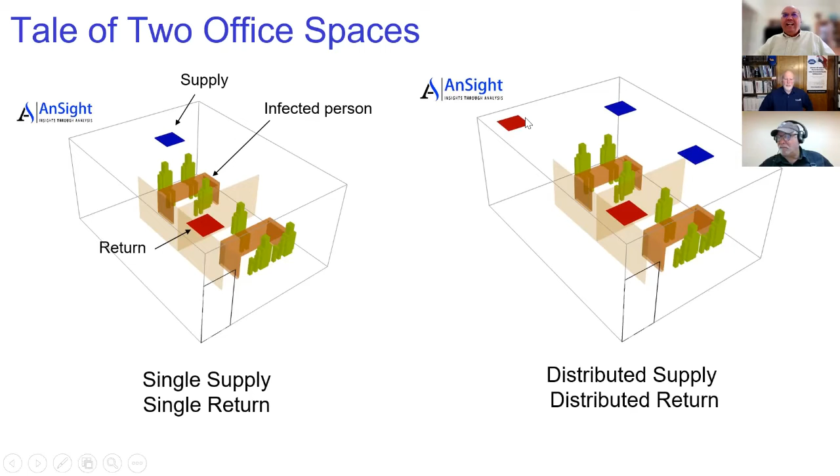In another example, it's the same office space, but instead of bringing air just from one diffuser, I divide it among 2 diffusers here, 2 blue squares. I'm not increasing the amount of air, I'm just distributing it in 2 places. And instead of taking it out just from one red square, the return, I created one more grill here. 2 grills, 2 supply. And you will see it makes a tremendous difference.

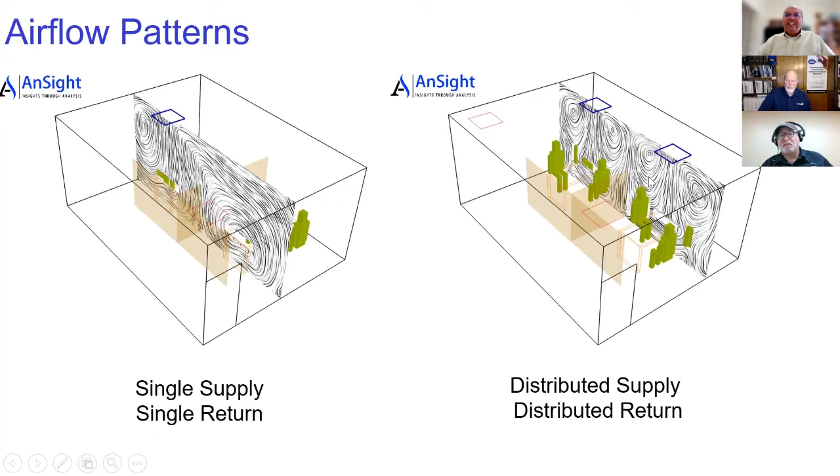These lines show how the air is moving into the space. In one case, air moves all the way to the other end and then circulates. Here, the air comes from 2 diffusers and they create their own tiny recirculation patterns. I call it aerodynamic containment, and I will explain why.

So what, aerodynamic what? Aerodynamic containment, and I will explain to you why I call that arrangement aerodynamic.

You take the path of least resistance, you take the first exit. Germs are doing the same thing. They are finding, hey, here is my exit. I don't need to go to another cubicle, I can get out from here.

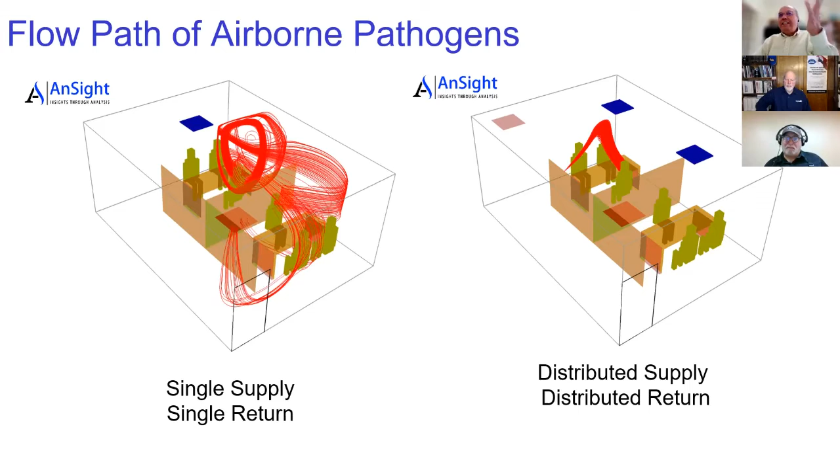Now, this is a computational fluid dynamics simulation. What it's telling me is two supply diffusers are better than one, and two return grills are better than one. That's the direction it gives you. It's not exactly predicting where people will sit or exactly which path the germs will follow. There is a possibility that this second arrangement is better than the first one.

So if you take this and color it by the probability that people will get infected in this space, this is the kind of cut plane at your nose level. This is another thing to understand: what happens at your breathing zone? I call it the breathing zone, it's about 4 to 6 feet height from the finished floor.

That is important. What happens near the floor and what happens near the ceiling is not as important as what you breathe in and what you breathe out. So if I look at the breathing plane of the people at about 4 feet height from the floor, what it tells me is I have a very high probability of infection with this kind of ventilation arrangement.

More people will get infected, even if they are 6 feet apart. We are talking so much about this social distancing, but social distancing is as good as the airflow around you. If you have a bad airflow pattern, as in this case, 6 feet distance doesn't work. You will still get the germs, and there is a high probability of getting infected.

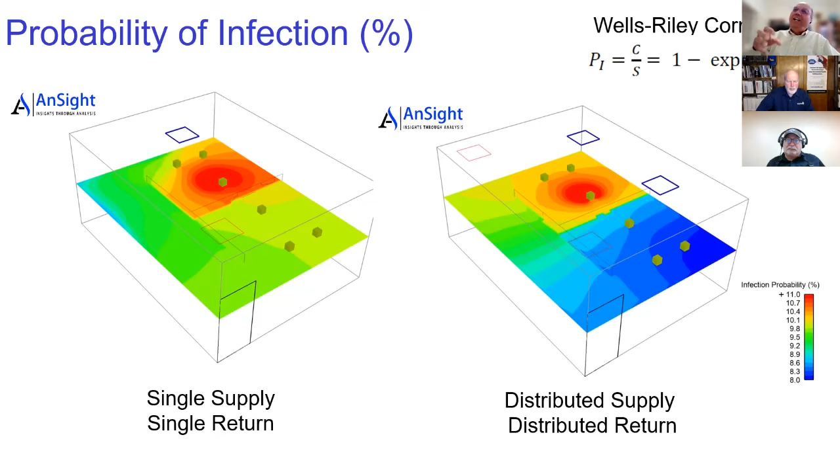Just put two supplies here, divide that air at two places, and bring it down and take it out from two places. Instead of supplying the air at one place and letting it move, you are supplying it at two places for the people. And so this green color turns to blue, meaning I reduce the probability of infection substantially, simply by supplying the flow of air over the people.

If I improve my ventilation here, bring air in a distributed fashion and take it out in a distributed way, I reduce that cloud size to 36% from 50%.

I'm not doing anything else. I'm not increasing airflow, not using any air cleaner, not using any UVC. I'm just using good clean air to dilute and mitigate the probability of infection of the contaminants here.

That's interesting. Now, you could also, if you wanted to, take that room divider out and look at it again and see with and without the room divider how those germs or virus would spread. And yes, that is another good point.

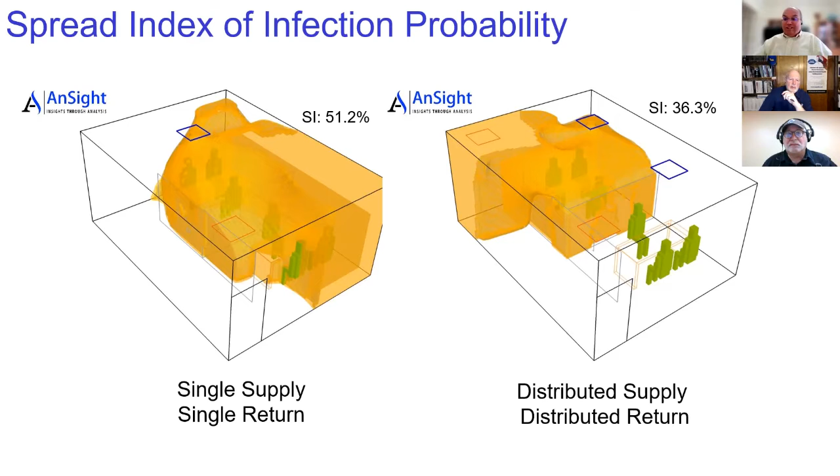Two things here. Number one, you need to have that building already built, occupied, and commissioned. In CFD, I can do this even if your design is still on paper, and I can catch anything that's not right or going wrong at even the conceptual stage of the design. That's the power of it.

The second problem with smoke visualization or any other tracer gas is it's only as good as where you look and where you measure it, where you put the sensors. How many sensors are you going to put in a breathing zone to get the complete understanding and picture of what's happening? As I showed you, that cloud covering 50% of the room is not good—the indoor air quality is bad. I'm telling you, visually I can't draw that picture by just measuring at four points in a room.

And you also can't leave people out of the room. So my question is, how much do the people being in the room affect the fluid flows through the room? Excellent question again, thanks for asking that.

People do two things. One, they are simply an obstruction to airflow. When the air comes to me, it bumps into me, goes around me, and changes the airflow pattern into the space. That's number one.

Number two, which is very important and not obvious, is that we all generate heat—we are sources of sensible and latent heat to a certain extent. Hot air always goes up. As the air gets hot, it rises. This is common sense, but it's not so common, even among engineers, to know that hot air goes up. So if you have more and more people, you're putting more and more heat into the space. Now, if you supply air at 55 degrees, by the time it reaches you it's 65 or 70 degrees. When it comes to me or you, it picks up heat, gets hot, and rises. So it can modify the airflow patterns in the space, depending on what type of people and what they're doing—whether they're running in the gym or sitting relaxed watching a movie, how much heat they generate depends on their metabolic activity. So definitely, the presence of people can affect your airflow pattern, the simulation itself, and the performance of the ventilation system.

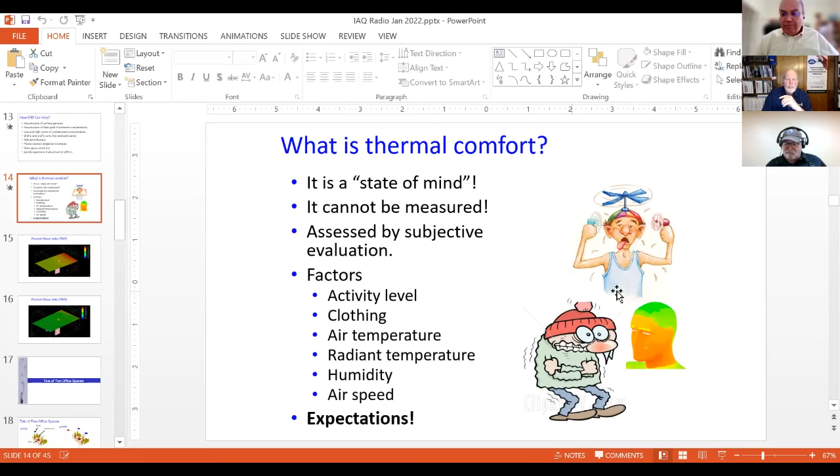So now in CFD, when you do any simulation, you know the air temperature, the radiant temperature, the air speed, and you can input what this person is doing. Is he just sitting and working at his desk, or is he jogging in the gym? We can input that and say what kind of clothes this person is wearing. Once you put all that in, you can create a simulation where I actually know how people will feel in that space. I can estimate that.

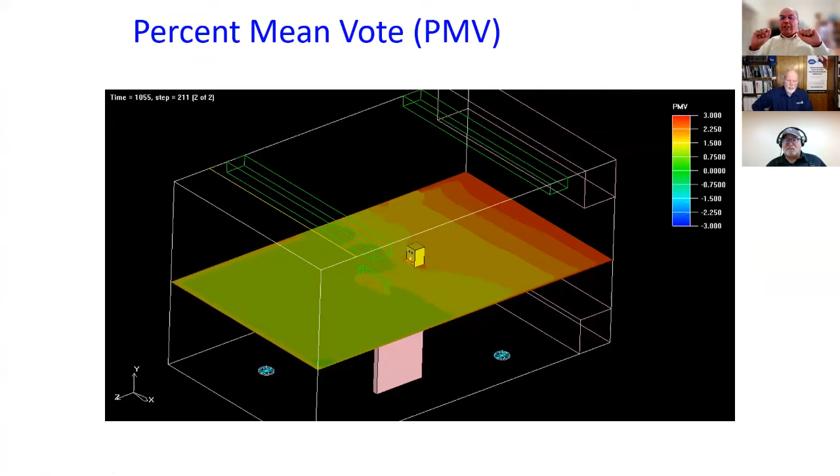Predicted mean vote is the ASHRAE Standard 55 index. It goes from -3 to 3. 3 means people will complain it's too hot. -3 means they will complain it's too cold. In this picture, the red color is where the hot window is; when this guy walks to the window, he's going to feel too hot. And if he walks towards the door away from that window, he will be about comfortable, not too cold, not too hot.

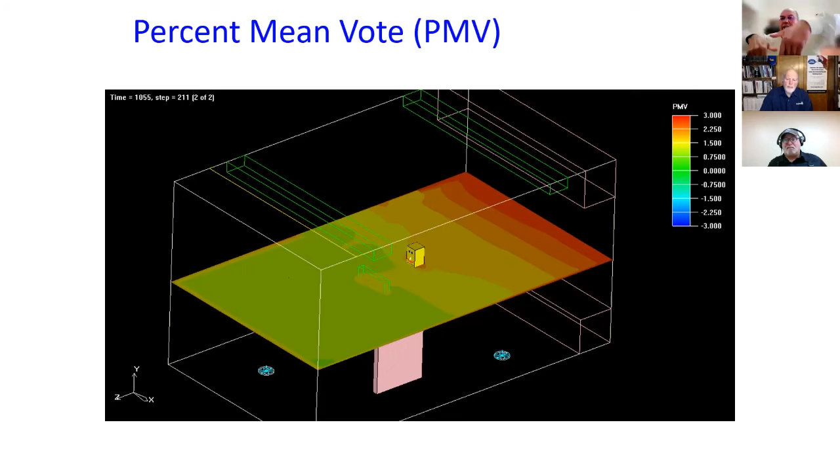Now, that's where CFD comes into the picture. Why is it hot there? Why will this person feel hot there? Because it is close to the hot window. In this design, they did not address that when there is a perimeter load, when there is a hot window, we need to inject the cold air in front of that window to take care of that. This design is missing that point.

When I did the other simulation and I added a passive chilled beam on the top of that window — a passive chilled beam is just the cold coil on the top, it makes the air cold and cold air falls down, hot air goes up, and it creates kind of an air circulation, an air curtain in front of that hot window. As soon as I put that in my model, you see that hot spot has gone.

Yeah. Now, if you build this building, commission it, and let this guy go there and sit and work for 2 months, and then he starts complaining, are you going to put a passive chilled beam there? It's too late. It will cost you millions of dollars to make such retrofits into the building.

I have a concern, Joe. My concern is our industry has enjoyed a passive consumer over the years, over centuries. What I mean by passive consumer: we don't complain about our comfort, thermal comfort. We don't complain about indoor air quality.

As I told you, if you sit in a restaurant and a draft comes on you, how many times do you call a server or the restaurant owner and say, hey, you know what? I'm feeling cold here in this spot. And all the customers who are coming, they will feel cold in this spot. You need to do something. What we think is, oh, I'm just there for an hour or so. Right. I will ask the server, hey, please change my seat. I'm cold here. And once we don't complain, the quality doesn't get improved.

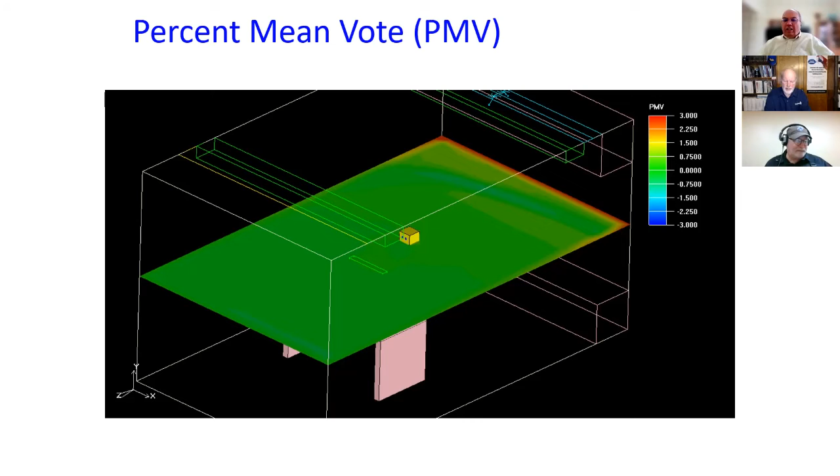CFD is a tool. Try to understand, it's not the end in itself. I always give this example. If you are hiking in dark woods in the nighttime, you don't have a flashlight in your hand, you may fall off the cliff. You don't see your way. What does a flashlight do? It shows you the way. But a flashlight is not a GPS system. It's not going to tell you take a right turn, left turn, go straight. It shows you the way, and it helps you not to fall off the cliff. CFD is like that. It's a flashlight in your designer's hand.

So you can use this as a tool to find out potential problems. And what can I do? What can I do more to make my people happy, to make my people comfortable, to make my people breathe the right quality air into the space? If I am compassionate about the people, then I will do all that due diligence to make sure my design is going to help the people, going to create a healthy building. Not just on the paper, not in your slogan, not just in your mission statement, but it's actually implemented and efforts are made towards that.

So you don't have to do each and every room. Learn from it. Learn from every simulation. That's why gaining insights from your simulation is important. You need to be a good engineer first before you start using CFD. You should be able to separate out what is good and what is bad, what this simulation is telling me, what the physics is telling me. When I build the next hospital, the next office space, the next operating room, what should I do? What did the simulation tell me?